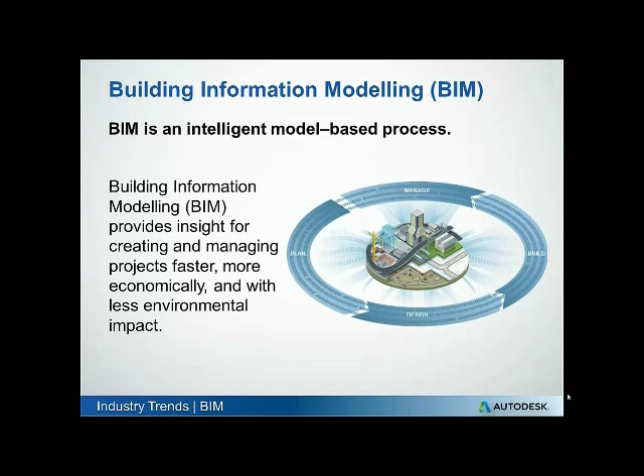A global market analysis and forecast done by Pike Research in 2012 on building information modeling concluded that for those who are or have been using BIM tools for a period of time, BIM has proven to be remarkably successful in the results it can produce.

BIM has driven costs down and made the estimation process more accurate. In addition, Pike Research suggests as energy conservation and carbon emissions become increasingly important on a global basis, the adoption of BIM tools and practices will become a higher priority, since they can significantly affect the efficient use of valuable and scarce resources. According also to Pike Research, early adopters of BIM tools and practices can gain a significant advantage over their competitors.

BIM has both short and long-term benefits. Some of the benefits of BIM can be experienced on the user's first few projects, such as reduced errors and omissions and the reduction of rework. Other benefits require a longer time frame to demonstrate their value, such as overall reduced cost, maintaining repeat business, and increasing profits. The fastest growing long-term benefit: increased profits.

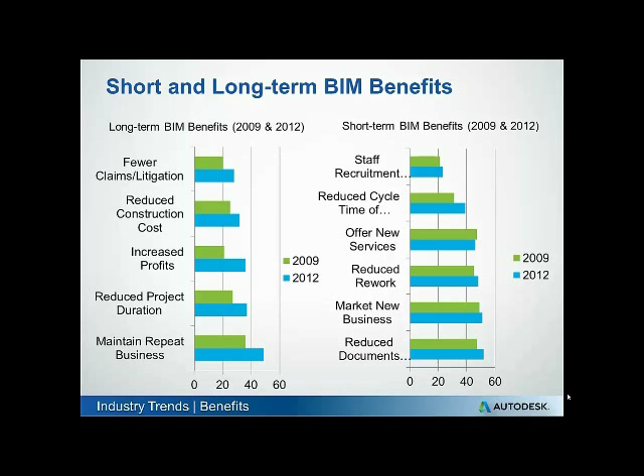Another fast-growing long-term benefit is fewer claims and litigation. This indicates a growing belief that as more problems are avoided during construction and claims measurably diminish, this will be a reliable benefit of the future.

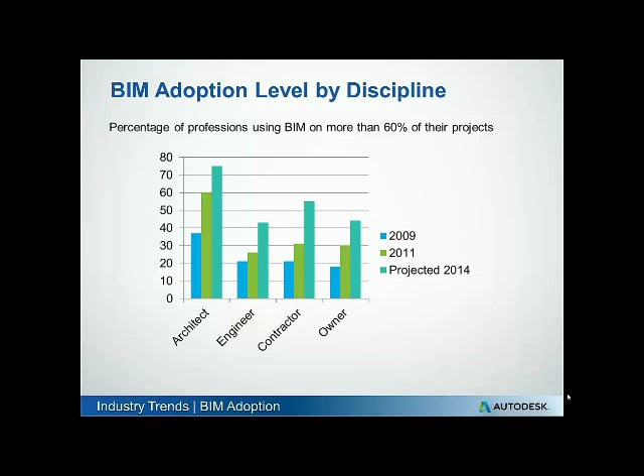Engineers actually had the lowest level in 2011, but it's important to note that this is expected to grow to over 40% by the year 2014. You'll also see the fastest rate of growth is projected for contractors, and I'd also like to note that this is consistent with what we are seeing here in southwestern Virginia and West Virginia.

While these trends will shape the building industry over a long period of time, many firms are facing immediate business challenges such as how to win new work, how to meet client requirements for BIM, and delivering projects more efficiently to increase profitability. Firms facing these challenges must find ways to alleviate them by improving their business processes.

They must examine how the services they provide will prepare them for future demands of the industry and their clients. They must understand why more owners and governments are requiring building information modeling and how they can meet this need. And finally, firms must find ways to work more collaboratively to improve the design and building process.

And we're excited because we believe Autodesk tools, specifically the Building Design Suites, can help your organization meet these challenges. So let's talk a little bit about the Building Design Suites.

The Autodesk Building Design Suites are comprehensive software solutions that combine building information modeling and CAD tools to help you design, simulate, visualize, document, and ultimately build better buildings.

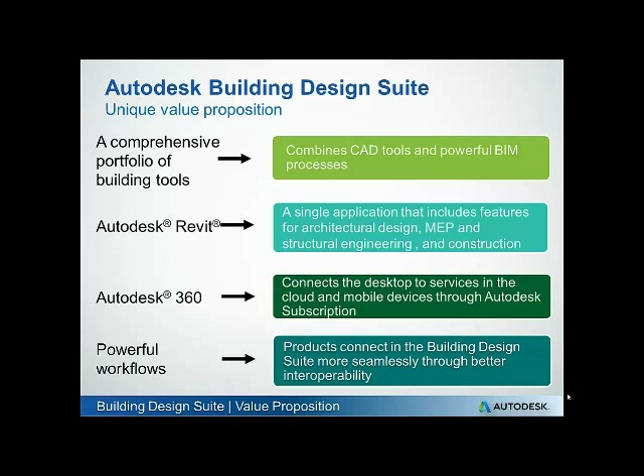So what software is included in the Autodesk Building Design Suites? First of all, there are 3 editions: a Standard Edition, a Premium, and an Ultimate.

Let me talk first about the Autodesk Building Design Suite Standard. This is based on AutoCAD. It includes the latest release of AutoCAD as well as AutoCAD Architecture and AutoCAD MEP. It also includes Showcase, which is a 3D presentation and visualization tool.

New to this suite are also 2 additional applications. First is Autodesk Raster Design for raster to vector conversion, and also a new application we're going to show a video on here in a little bit called ReCap, which revolutionizes the way we can capture design information and bring it into your software.

The Autodesk Building Design Suite Premium adds the software already in the Standard Edition, but it adds the power of building information modeling with the Revit 2014 software. It also includes 3ds Max Design for even more compelling visualizations, and Navisworks Simulate, which provides advanced tools for simulation and features to better communicate your project information.

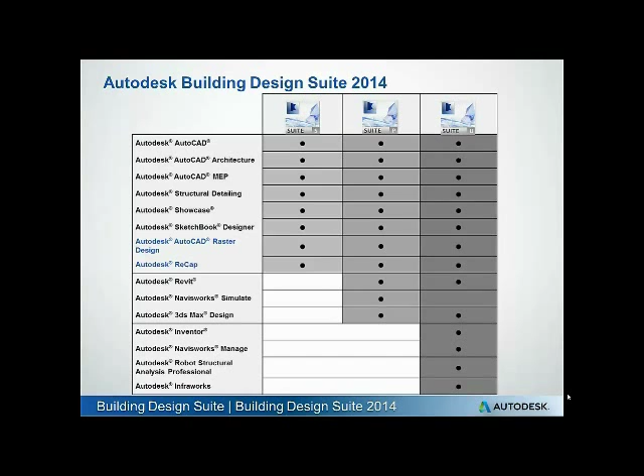The three editions of Autodesk Building Design Suite have varying Autodesk 360 cloud service entitlements. All editions on Autodesk subscription have basic storage, view, and collaboration entitlements. Cloud credits are units of measure used to pay for some of these additional services.

The Building Design Suite Standard on subscription includes rendering with Autodesk 360 and Green Building Studio web-based energy analysis that can help you perform whole building analysis, optimize energy efficiency, and work toward carbon neutral designs earlier in the design process.

The benefits are cumulative, so Building Design Suite Premium on subscription customers get everything just mentioned, plus access to structural analysis for Autodesk Revit and energy analysis for Autodesk Revit. Ultimate customers add optimization for Inventor and Autodesk InfraWorks 360, which complement the products in the suite.

Now that we've gone through some of the industry trends and the Autodesk Building Design Suite capabilities, let's dive in and call out some of the new products and features in the Building Design Suite.

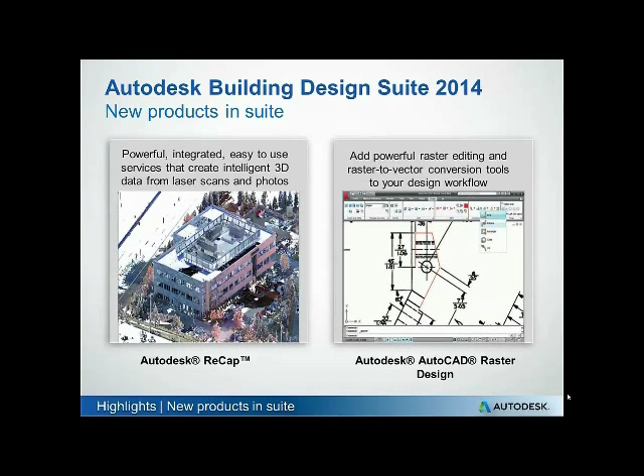Another new product to the suite is Raster Design. Autodesk Raster Design provides powerful raster editing and raster to vector conversion tools to help increase the visual information on a building plan.

Let's talk about a few of the new features in Revit 2014. The list includes platform enhancements, design and documentation, interoperability, and analysis.

The new Building Element Energy Analysis tool performs energy analysis using detailed Revit models, and we're going to talk a little bit more about this feature in a bit.

You're also going to see some documentation improvements that allow you to display alternate dimension units along with primary units for all permanent and spot dimension types to comply with common dimensioning standards.

Construction documents are now improved, and you have the ability to create non-rectangular crop regions that allow easier presentation of reference model areas and give more efficient documentation layout.

We also have improved interoperability between Revit and AutoCAD. You can collaborate more effectively, with improvements pertaining to IFC, DWF, DWG, and 3D solids.

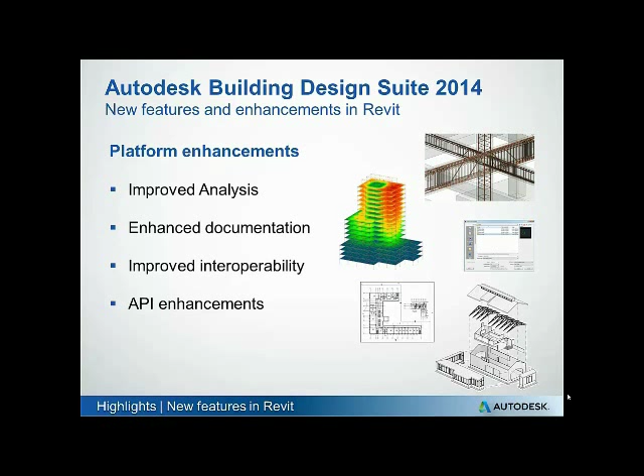We've also seen significant enhancements to the API. The big thing here is a new duct and pipe design calculation API that allows third-party developers to create their own calculation add-ins to override the default ones used in Revit, so now we can support local industry standards.

Let's go into a little more detail about Revit, talking about some of the schedule enhancements. Improvements in Revit 2014 give you more control over schedule formatting and increased access to the data within your model. These enhancements can help with text and table formatting for better customization and more intuitive access to the parameters in your model.

Text properties and table formatting improvements help give you more control and make the schedules look the way that you want.

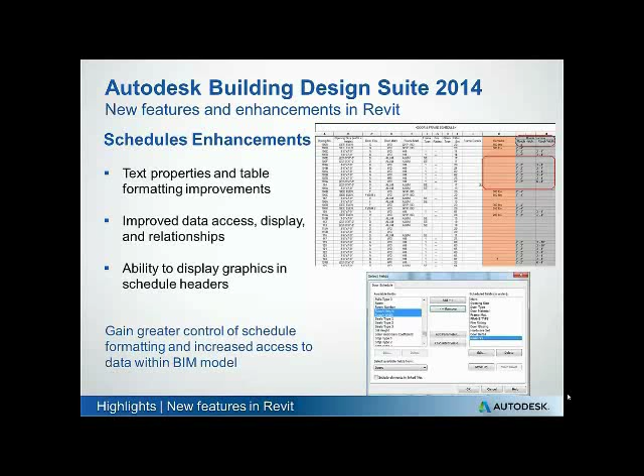Enhancements made to stair and railing tools are in response to customer requests to more easily model, edit, and document stair and railing designs. With Revit 2014, you can edit rail patterns and customize the stair winder pattern.

Enhancements to run width, stair representation, stair join, and others help improve the quality of your designs. Railing transitions have also been improved, as well as the usability of stair tools. Bottom line, now you can more easily model, edit, and document stair and railing designs to meet your requirements.

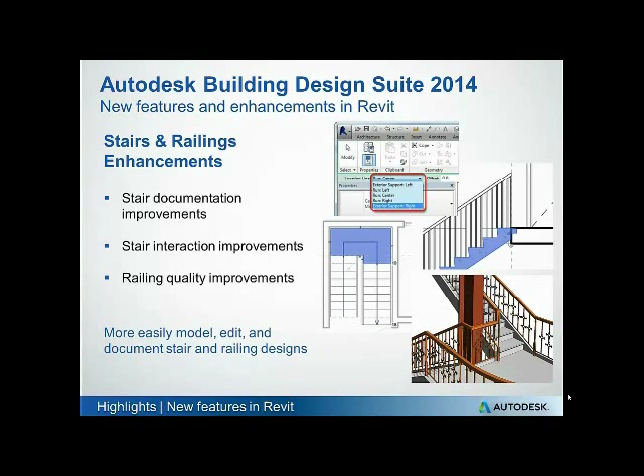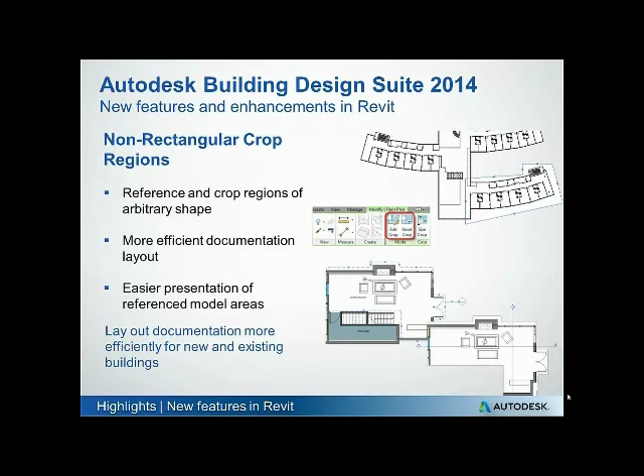The new non-rectangular crop tool gives you increased flexibility when documenting and editing existing layouts. You can save time by eliminating some of the cumbersome workarounds that our clients have developed in the past. This allows easier presentation of reference model areas and gives more efficient documentation layout.

With the new Displaced Elements feature, you can create an exploded view of any 3D view, including a perspective. Exploded views can be used to illustrate the relationship model elements have to the model as a whole, and this information can be used in your construction documents to show design intent.

In any 3D view, including a perspective, model elements can be moved using the Displace Elements tool. You use this tool to create displacement sets and move them along their X, Y, and Z axis to a specified distance away from the model. Then you can draw paths that connect these elements back to their original location.

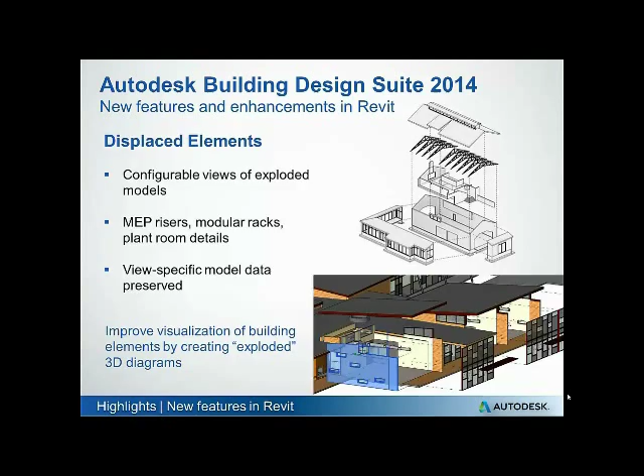Revit 2014 features fairly dramatic performance improvements that can seriously impact your productivity.

In this release, you have the option to temporarily suspend certain features that affect the display of the model. This option improves performance when you're navigating a 2D or 3D view in ways that manipulate the camera. Bottom line, performance improvements can deliver a smoother experience when working on Revit projects of any size.

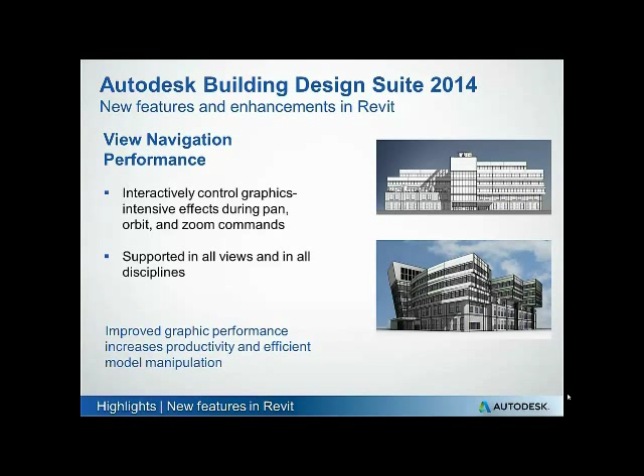Now, in addition to the energy analysis of conceptual massing elements, you can perform energy analysis using detailed Revit models. The Building Element Simulation option creates an energy analytical model directly from your Revit building elements and sends it to Green Building Studio for simulation using DOE 2.2.

This new feature works both with and without the placement of Revit room and space objects. The tool also accounts for more complex model geometry like sloped walls, varying wall thicknesses, and plenum spaces. There's no need to prepare the model for analysis or rebuild a separate model, so now you can conduct more reliable, repeatable whole building energy analysis in much less time.

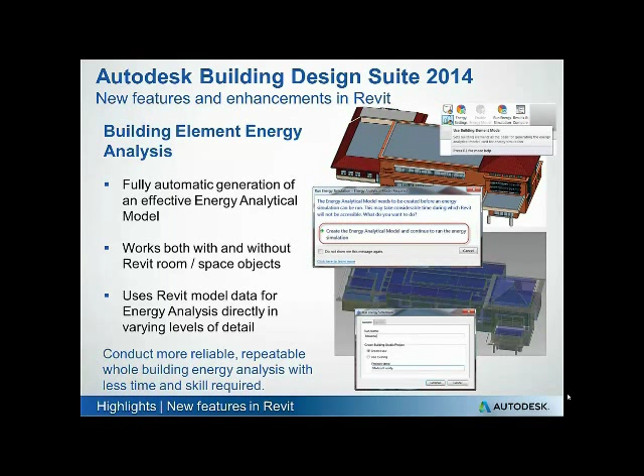The 2014 release of Revit makes using point cloud data even better and easier than ever before, with improved performance and usability. The new point cloud engine allows you to link RCP and RCS format point clouds into a project.

The point cloud tool can also be used to index raw format point clouds to the RCP RCS formats. New visibility and graphics override options allow you to control the color mode for the point cloud display.

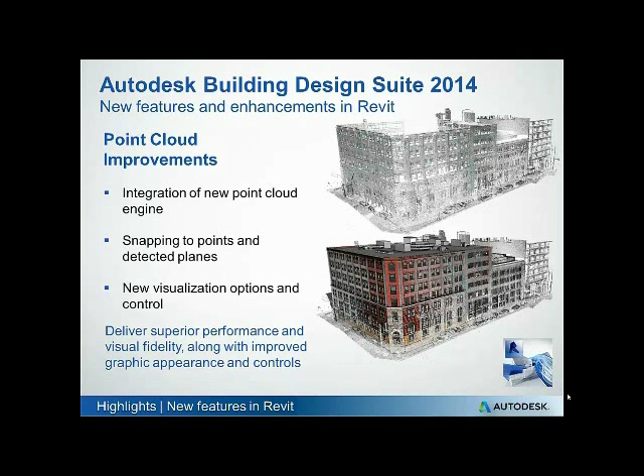Let's move on a little bit and talk about Navisworks Simulate and Manage. Quantification is the big new feature in both Navisworks Simulate and Navisworks Manage 2014.

It enables you to bring quantities from a model into a project. Quantification enables quantities from model properties, ties the quantification data to model objects without properties, and creates quantity placeholders for non-modeled items.

The ability to go from high-level detailed models to virtually no details and still enable the proper quantity takeoff will support your entire project team from design to field execution. A workbook is also included that keeps a running report of all quantities in the model, and this can be exported to Excel for downstream workflows, including use in standard estimating applications.

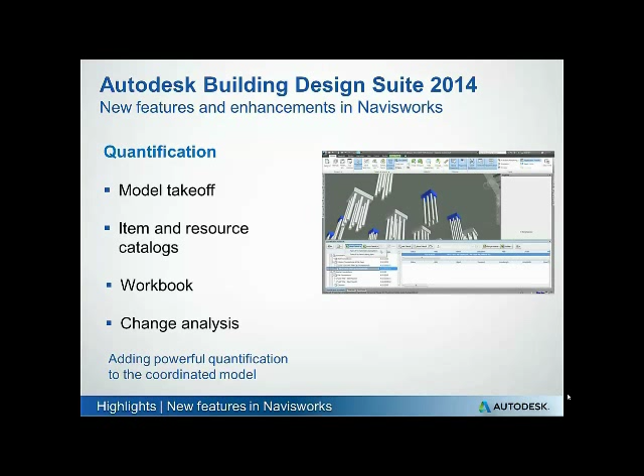Now that we've covered what's new in the suite, we'd like to share four video presentations on how the Building Design Suite products can address specific architecture design challenges and help you meet your client requirements, win more business, and increase profitability.

The first video presentation we will be featuring shows the new Autodesk product ReCap.

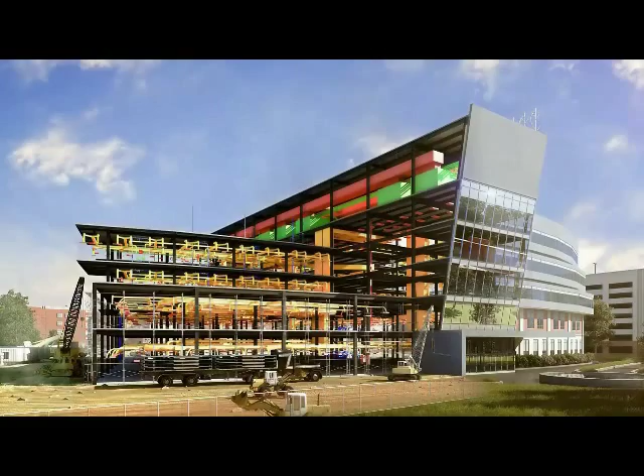As more architects and engineers work on the renovation of existing buildings, the process of gathering existing conditions has become a critical part of the workflow. Certain buildings make the manual collection of as-built information extremely difficult, very time-consuming, and sometimes impossible. Autodesk Revit and Autodesk ReCap, both included in the Autodesk Building Design Suite Premium and Ultimate editions, work seamlessly together to address these challenges.

Autodesk ReCap delivers powerful and easy-to-use workflows on the desktop and in the cloud to create intelligent 3D models from point cloud files via laser scans and captured photos. Rather than beginning with a blank sheet, Autodesk ReCap now enables any designer to add, modify, validate, and document their design process in the context of existing environments.

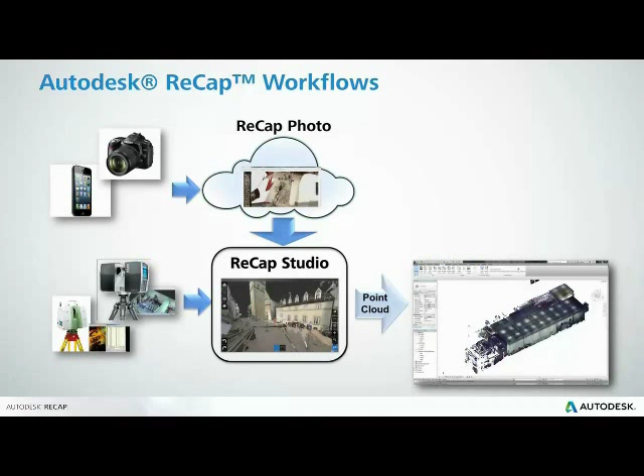When using photos, captured images are converted in the cloud via ReCap Photo and then exported as point cloud files via ReCap Studio. Similarly, ReCap Studio can create point cloud files directly from laser scans.

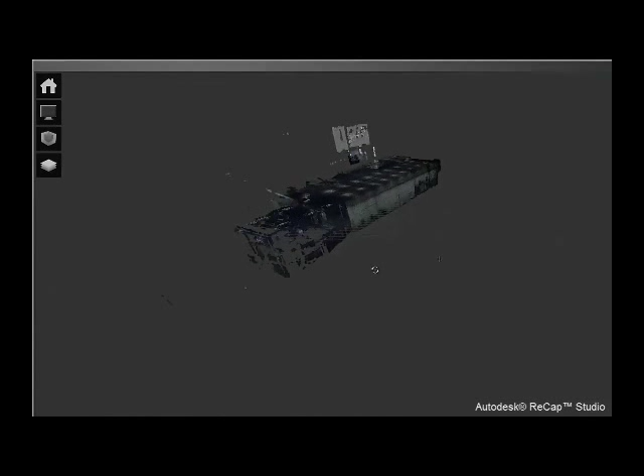Point clouds created using Autodesk ReCap can be inserted into your Revit model just like any other data that you use. Since the data is comprised of 3D information, it can be accessed in all common views used today, such as sections, plans, and elevations. Using common view manipulations, you can isolate particular regions of the point cloud, which is particularly helpful in gaining a better understanding of the various aspects of your existing building.

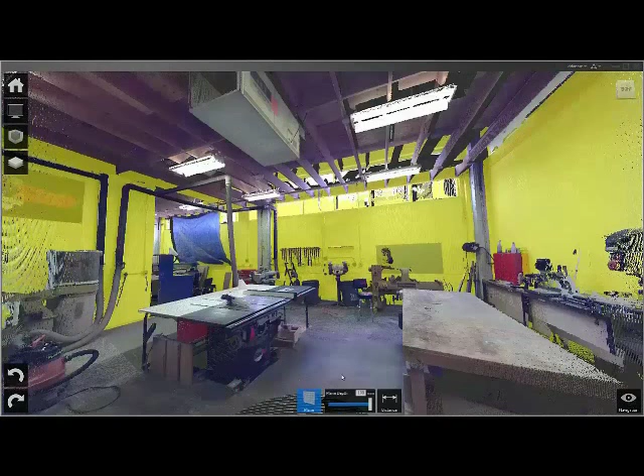In order to create model geometry of an existing building, you can easily snap to point cloud data to create geometry such as walls, columns, and floors. This enables you to quickly recreate elements that depict as-built conditions.

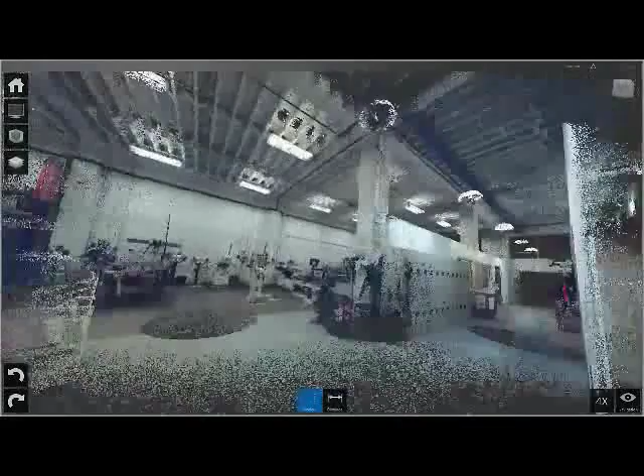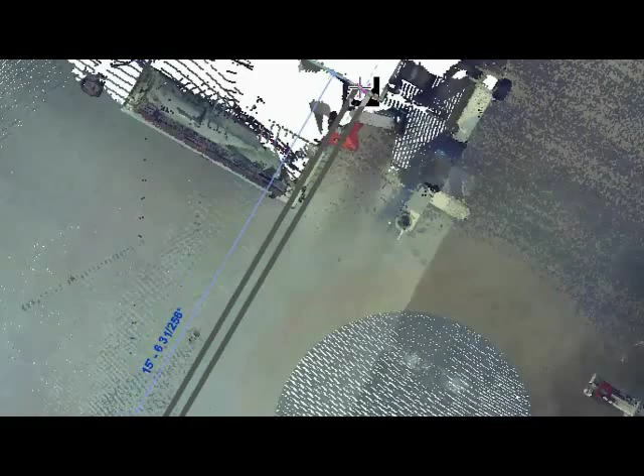Using point cloud data created in Autodesk ReCap within your Revit models, you can use normal modeling techniques already part of your workflow to create your model. As the model progresses, you can begin to see actual building elements in place of the point cloud data. The end result is a consumable, rich information model that can be used as the basis of your renovation.

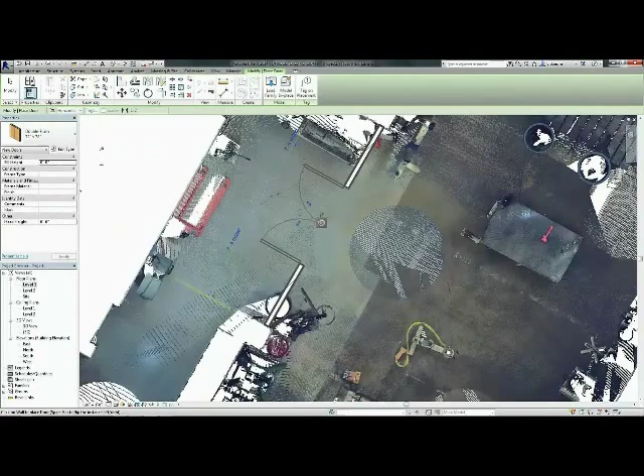Using Autodesk Building Design Suite, specifically Autodesk Revit and Autodesk ReCap, you can take on complex renovation projects with accuracy, consistency, and confidence.

Now we'll show some of the new energy analysis capabilities.

Building performance analysis provides unique insights into the energy and environmental performance of buildings at any stage in their life cycle. This is invaluable to delivering and maintaining higher performing buildings more effectively and with greater certainty, both of which are critically important investment factors for building owners today.

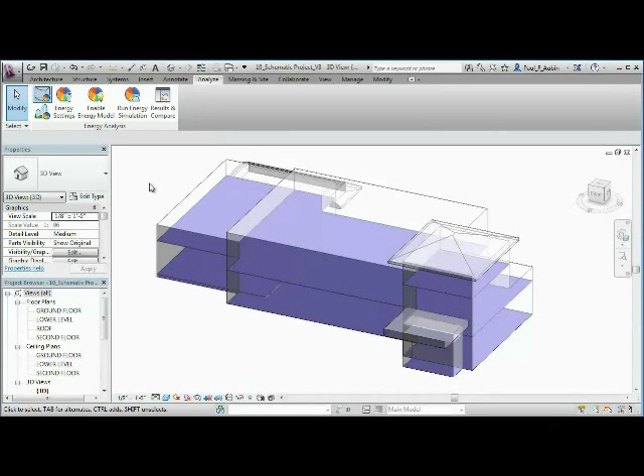Autodesk Revit, included in the Building Design Suite Premium and Ultimate editions, as well as Energy Analysis for Revit, a cloud-based analysis tool offered as a subscription benefit, work effectively together to help inform sustainable design decisions. For example, during the early stages of a project, architects and engineers can use Energy Analysis for Revit to compare the energy consumption and cost of multiple design alternatives directly within Revit.

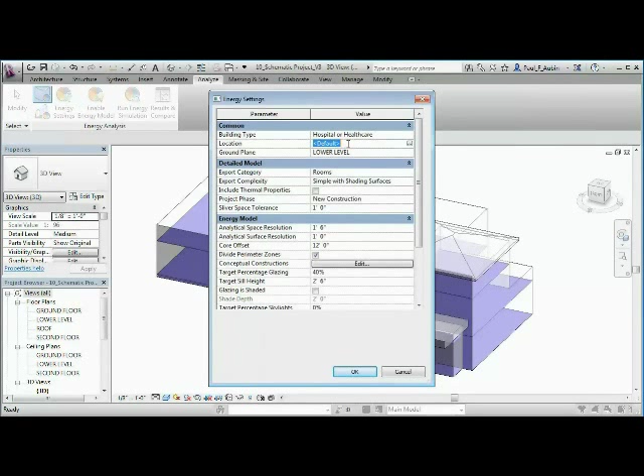The process is simple. Using conceptual massing forms in your project, you can automatically convert concept models into energy models for analysis. You can even factor in the physical location of your project, since Energy Analysis for Revit accesses a cloud-based global climate database that contains more than 1.5 million weather datasets, ensuring the accuracy is based on the most up-to-date information available.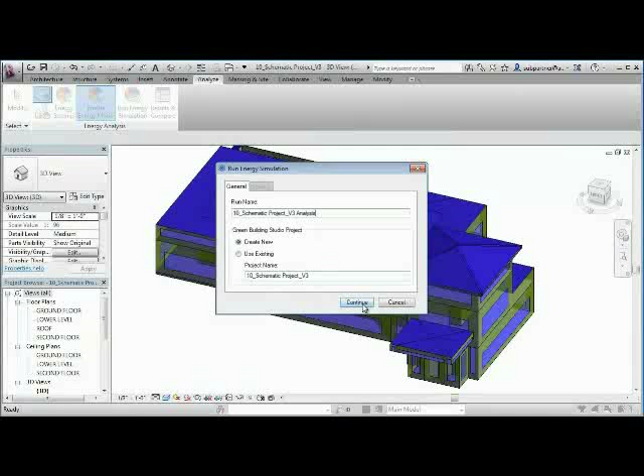Lastly, Energy Analysis for Revit delivers easy-to-understand graphical results. Multiple design options can even be compared and evaluated side by side with reports that compare energy use, life cycle costs, and a breakdown of consumption and loads.

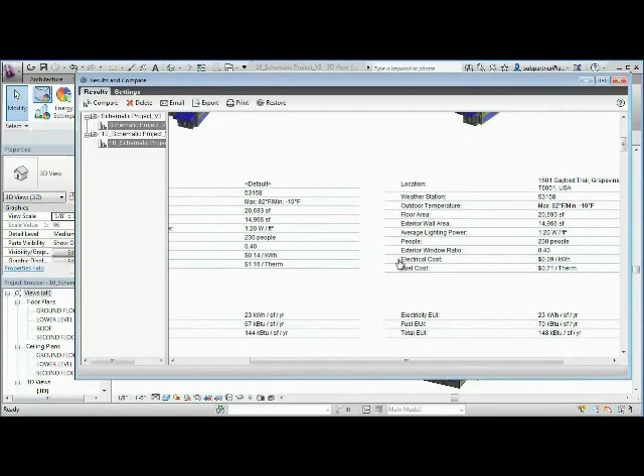Using the Building Design Suite and its subscription services, specifically Autodesk Revit and Energy Analysis for Revit, you can adopt more scalable, sustainable design workflows that fit into your standard processes today.

Communicating our design intent and selling our ideas is key to growing our business.

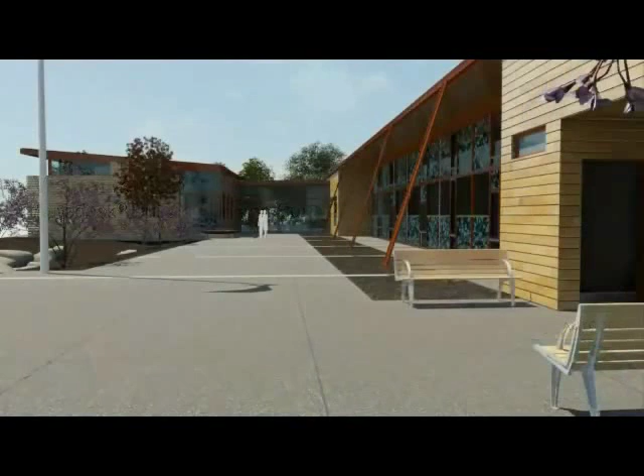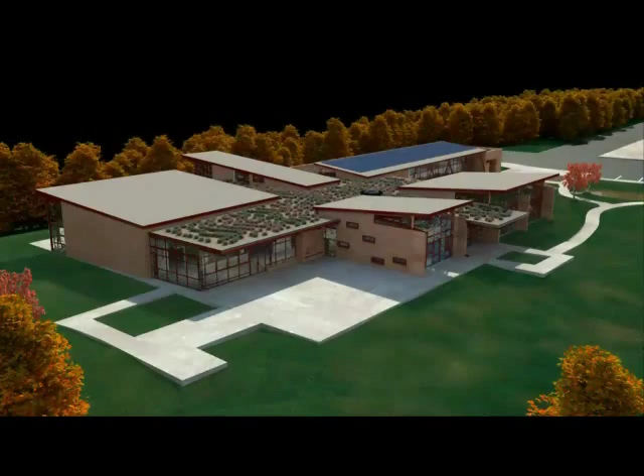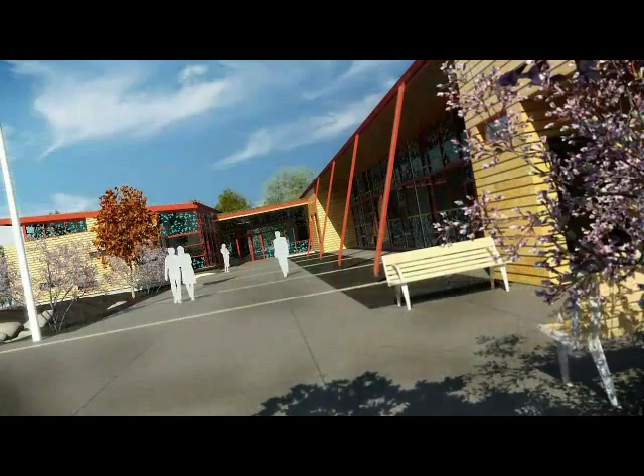Creating compelling visualizations is an important component to winning new business. It's a key way to differentiate yourself from your competition. But often the process requires the use of trained professionals who specialize in this type of work, and generally this expertise isn't in-house, meaning the work must be outsourced, which can be time-consuming and costly. Autodesk Revit and 3ds Max Design, both offered in Autodesk Building Design Suite Premium and Ultimate editions, can address these challenges.

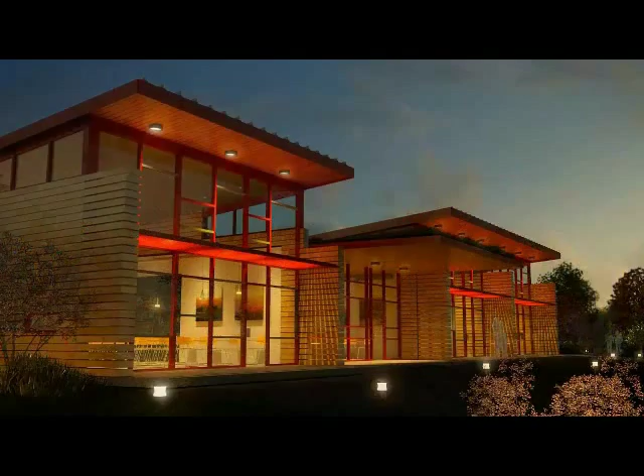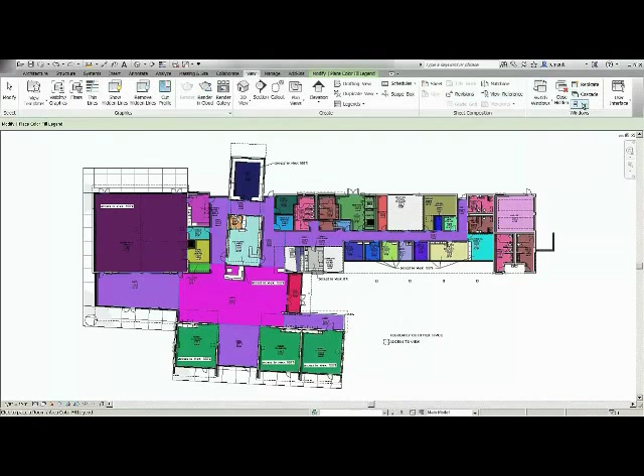Architects and engineers who use Autodesk Revit can present their designs in a variety of ways to convey design intent to stakeholders for the purpose of gaining buy-in and winning business. Within Revit, there are many tools at your disposal, including traditional 2D presentation views such as space plans, sections, and elevations, as well as 3D views that automatically update as 2D views change.

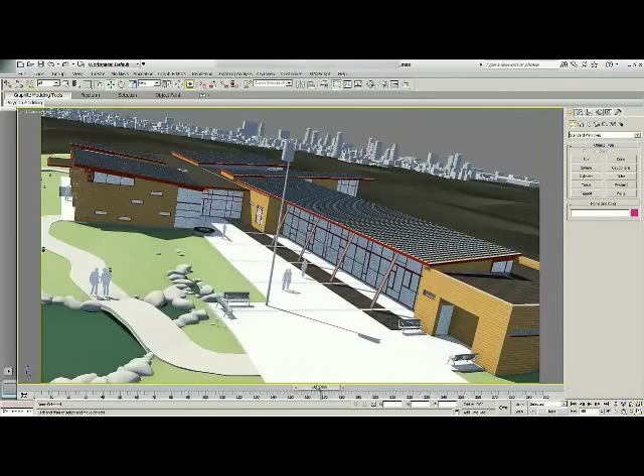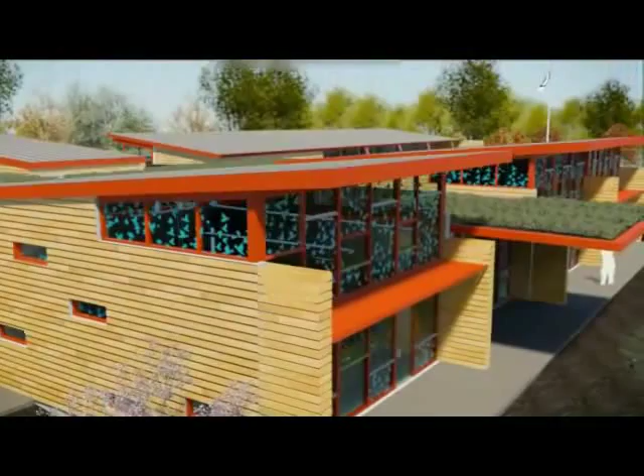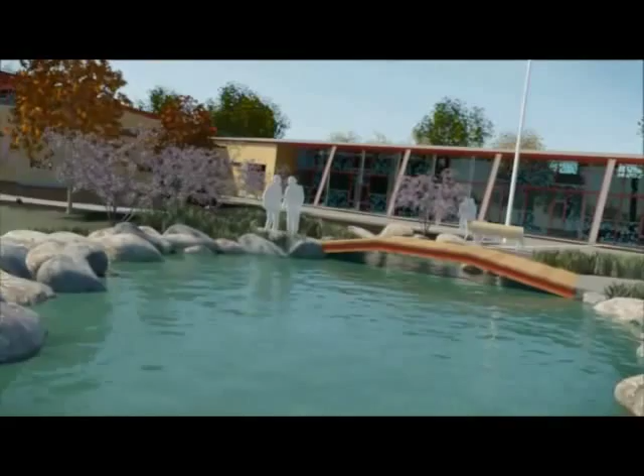For designers who want to take their visualizations to the next level, Autodesk Revit also provides a seamless workflow with 3ds Max Design, a comprehensive 3D modeling, animation, and rendering solution used by architects, designers, and civil engineers. By simply using the built-in export tools within Autodesk Revit, model files automatically export to 3ds Max Design, complete with building material, lighting, and even camera views that can be animated for photorealistic flybys and walkthroughs. With Revit and 3ds Max Design, both offered in the Autodesk Building Design Suite, you can validate and sell designs before they're built, rapidly iterate on design options through analysis tools, and deliver high-impact visuals and animations to win new business.

Effectively sharing our models is critical to partnering with other firms. Every organization should have a license of Navisworks Manage.

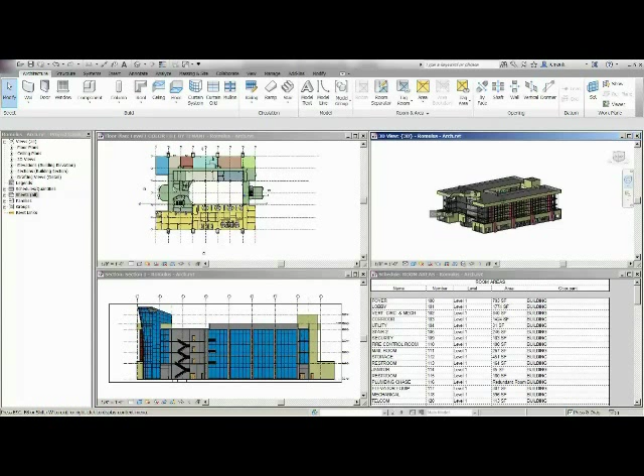Collaborating on projects with an extended, multidisciplinary design team of stakeholders can be a very difficult task to manage, especially when each team is using different design tools. The challenges resulting from this include lack of coordination, lack of insight into potential design issues before actual construction, and an increase in RFIs in the field once construction starts. All of these factors ultimately translate into longer construction schedules and wasted budget.

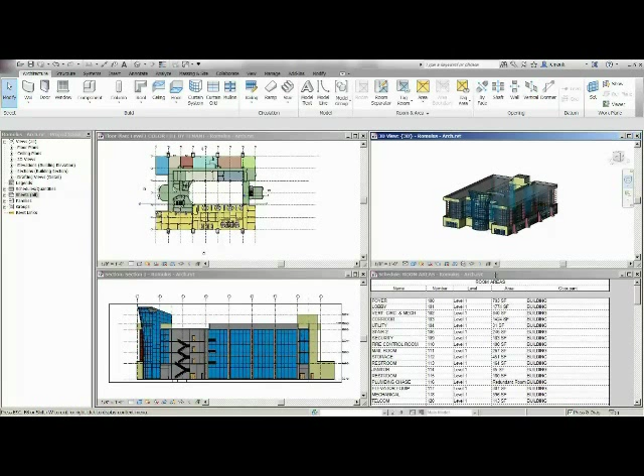Autodesk Revit and Autodesk Navisworks Manage, both offered in the Autodesk Building Design Suite Ultimate Edition, can address these challenges. Since Autodesk Revit creates BIM models where all the project views are coordinated, AEC professionals that leverage it for design intent and constructability purposes can be sure that plans, sections, elevations, and even schedules are all updated as the design changes, thereby reducing the possibility of inaccurate data.

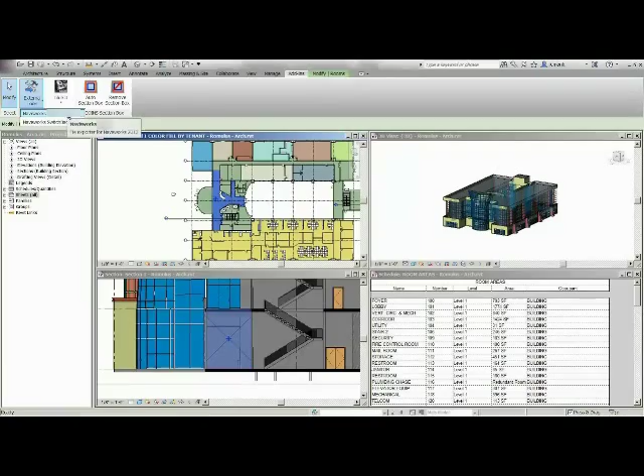And for those instances when the project team uses a variety of different design tools, Autodesk Navisworks Manage can help coordinate all of these project files. With support for a variety of commonly used file formats, including Revit, stakeholders can aggregate disparate project files into a single model so that it can be reviewed in real time.

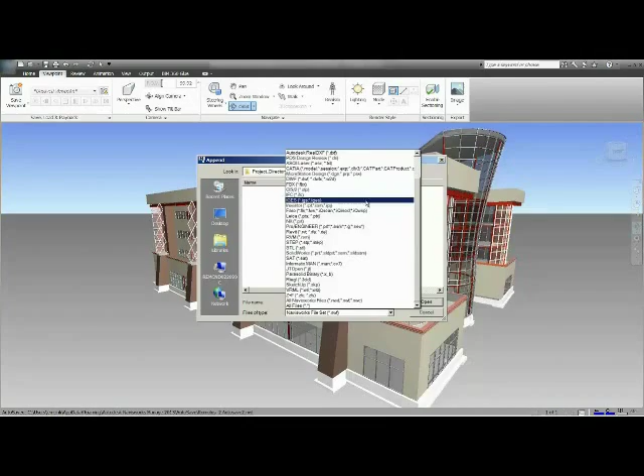You can even walk around the model itself before it's built to visually identify construction errors before they are discovered in the field. Common markup tools can even be used to document the errors.

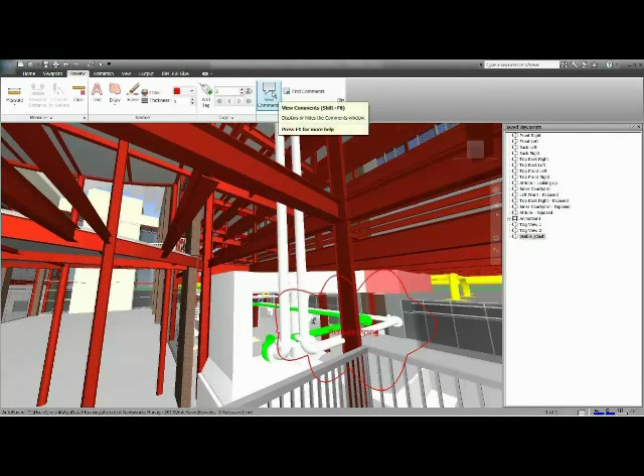And for the conflicts that can't be seen by the human eye, you can take advantage of the Navisworks Clash Detective feature that does a thorough analysis of the project data, highlighting clashes and collisions so that everyone can be aware of them and resolve them quickly, easily, and cheaply while the project is still in its digital stage.

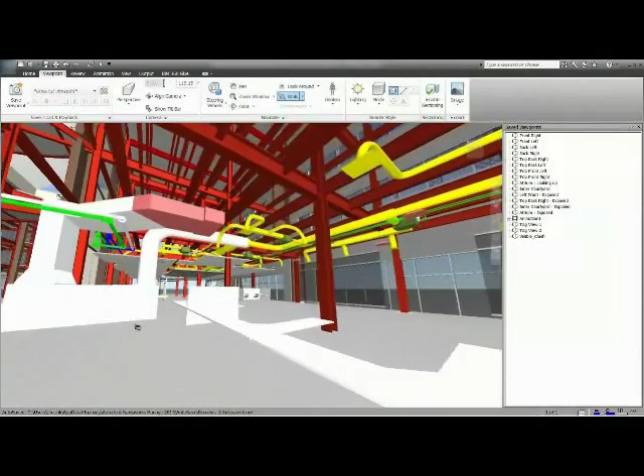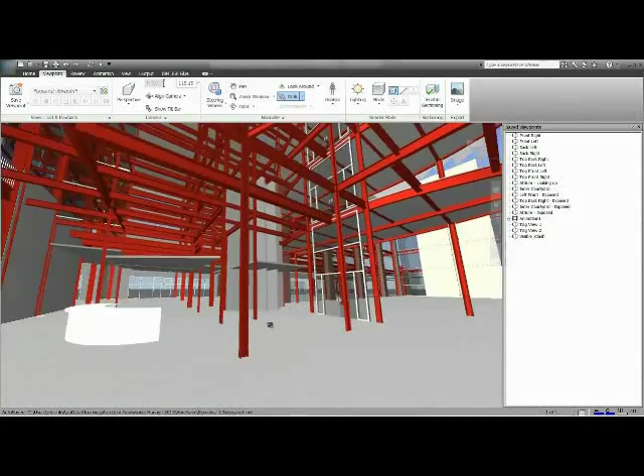With Autodesk Revit and Navisworks Manage, both available in the Autodesk Building Design Suite, AEC professionals can holistically review integrated models and data with stakeholders to gain better control over project outcomes through better cross-discipline coordination and earlier conflict resolution before construction or renovation begins.

Earlier we talked about the value of BIM and how it's changing the AEC industry. We talked about the short and long-term benefits of BIM and the adoption level by discipline, all of which points to the fact that BIM is now a key part of this industry. So how do you move to BIM, and what are the barriers that you may face?

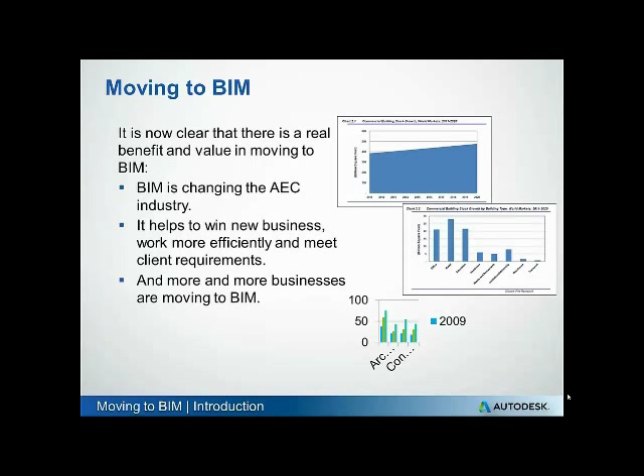I know Douglas and I have talked a lot about this, but a couple things that you need to think about as your organization moves forward with building information modeling.

Our most successful customers have realized that BIM, first and foremost, is a business decision. They've clearly identified how BIM will support their organization's strategy, and they have a common vision built on these business objectives. They've also acknowledged that BIM is a management decision. Adequate resources have to be committed if you're going to meet your goals. Most projects will fail without the proper resources.

And last but not least, BIM involves changing existing processes if you want to realize the larger benefits of building information modeling. You will restrict your return on investment if you simply replace CAD with BIM tools in your existing organization.

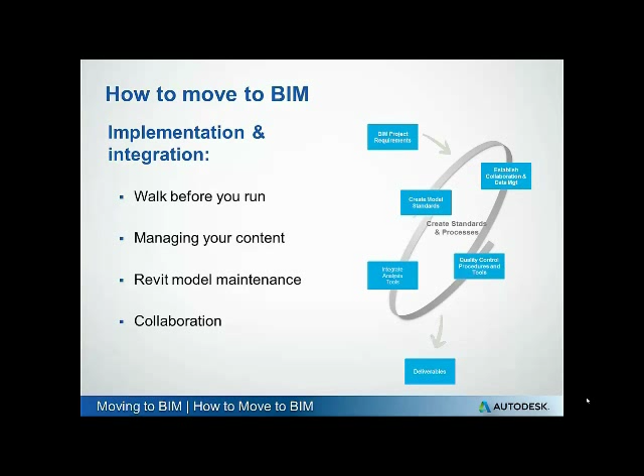Adoption and change management. Educate your clients. The number one important person is your client. As the industry moves towards BIM, firms must find ways to educate stakeholders who are not familiar with building information modeling. Have a kickoff meeting and talk about the level of detail and set expectations.

Involve your project managers. Project managers can look at new ways in managing their projects. The traditional workflow is a designer will print out a hard copy for the architect or engineer for comments and markups. Design Review will help project managers see project status of the model, and provide comments and markups without the need to print hard copies.

Keep improving and getting better. Establishing a learning path for current and new employees will set you on your way to success. Provide training materials such as manuals, videos, and in-house training sessions. Good management goals will help you win more work and set you apart from your competitors.